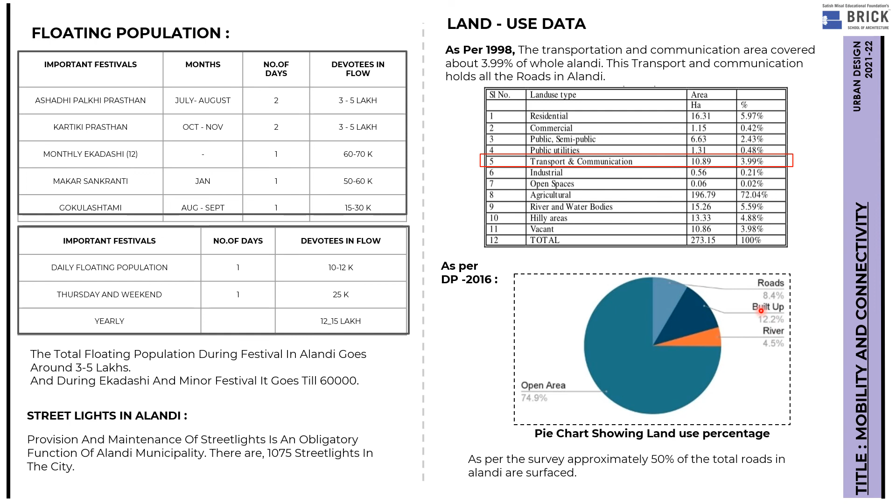The land use of Alandi has changed from 1998 to 2016. The average percentage of transport and communication was 3.9 percent in 1998, and it increased up to 8.4 percent in 2016. Jurisdiction and governance of the roads: the roads in Alandi come under the authorities NHAI, PWD, MSRDC, PMRDA and Jilla Parishad. Types of roads in Alandi: national highways, state highways, district roads and rural roads.

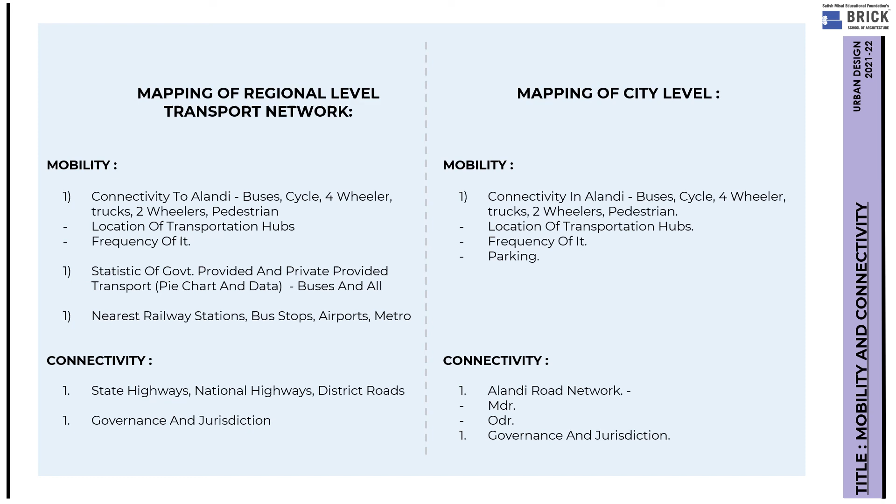Then we have mapped the regional level transportation system and city level transportation system on the criteria of mobility and connectivity. Coming towards the regional level transportation system, it has major railway stations, metro stations, an airport and bus stands. The nearest major railway station is in Pune, around 20 km from Alandi. There are several minor railway stations spread along Pune and Pimpri. The closest airport is around 16 km, in Pune. The total spread of the current metro line is around 31 km, and there are 4 new metro projects proposed in Pune and Pimpri.

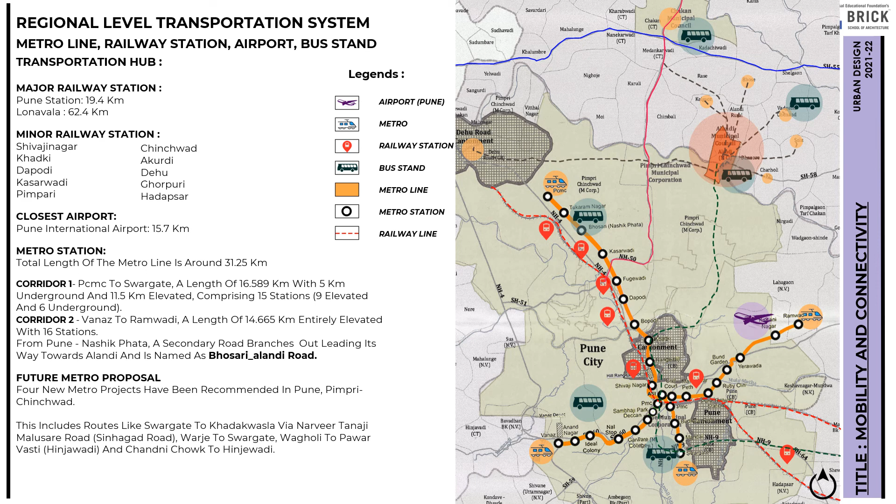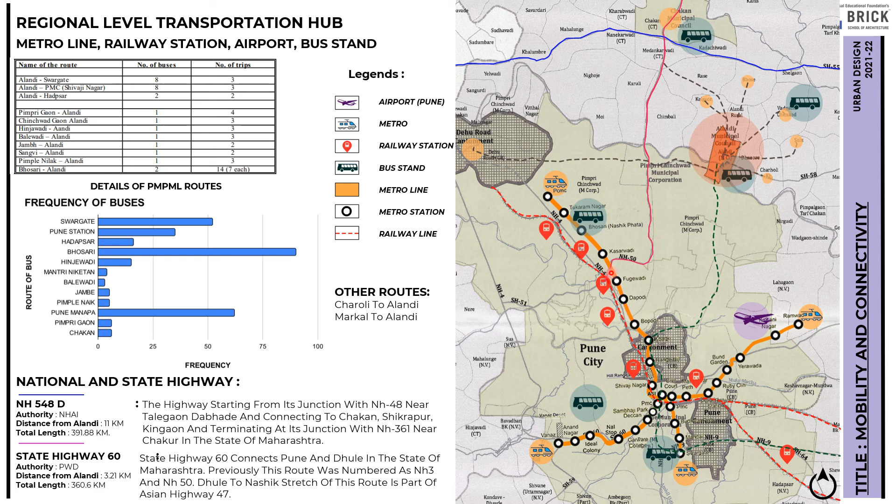Then coming towards the national and state highways: National Highway 548D. The authority which looks after this is NHAI, and it is around 11 km from Alandi. State Highway 60: the authority which looks after this is PWD State Highway. This is around 3.2 km from Alandi. The highway runs from Pune to Dhule.

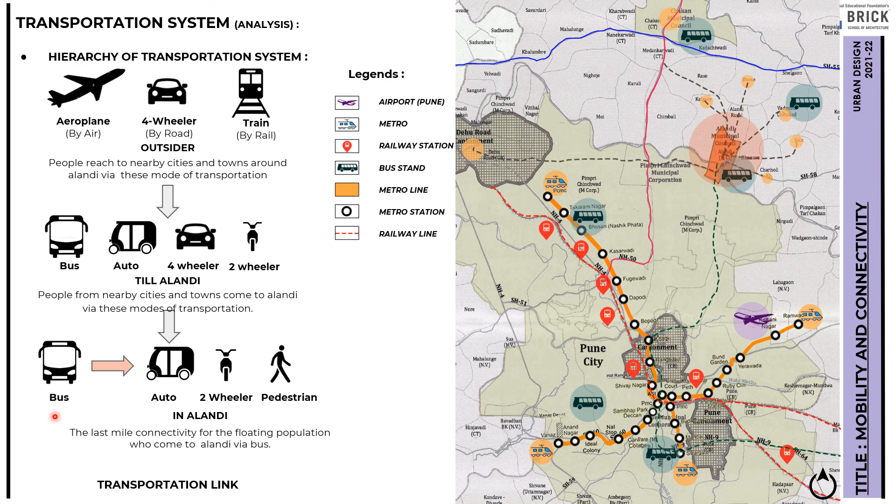The hierarchy of transportation system from outside Alandi to Alandi and inside Alandi. People reach nearby cities and towns around Alandi via aeroplane, four-wheelers and train. People from nearby cities and towns come to Alandi through bus, auto, four-wheeler and two-wheeler. Then the last mile connectivity for the floating population who come to Alandi via bus is auto, two-wheeler and walking. These are the PMPML routes from various places to Alandi.

Proposed transit lines at regional level. Proposed roads: there is a proposal of expressway, primary, secondary, arterial and subarterial roads in and around Alandi, which will be looked after by PWD. There is a proposal to expand the existing 2-lane highway to a 6-lane highway, which runs from Dehu to Alandi, and also the widening of Charoli Road, which will enable vehicles on Pune-Alandi Road to go via Charoli Fata Road. Railway proposal: Crescent Railway is a proposal for the future, around 12 kilometers from Alandi.

The proposed semi-high speed rail: there is a proposed semi-high speed rail network which will connect Pune and Nashik. Proposed metro: there is a proposal of a Nashik Phata and Chakan metro line. This extension will be undertaken in a future phase of the metro project.

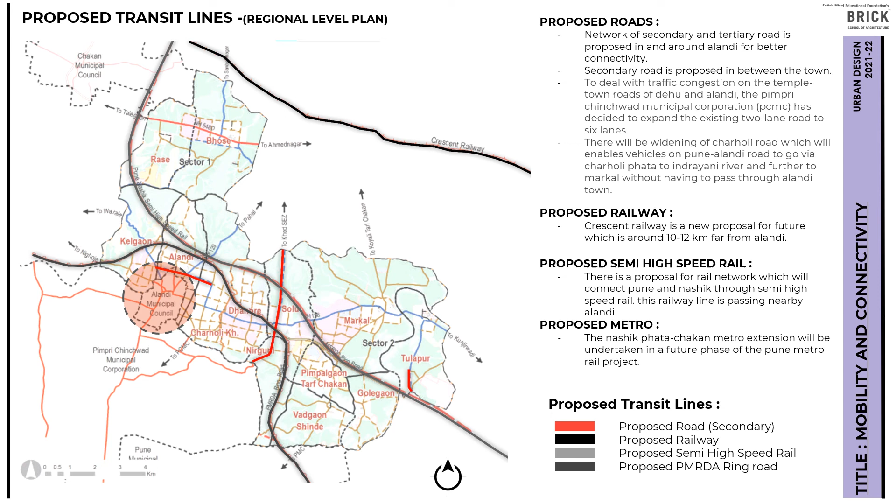NH 965, Saint Dnyaneshwar Maharaj Palki Marg, which was laid on 8 November 2021. The road is a 4-lane road with provision of a 7-meter wide road and a 3-meter wide pedestrian path, especially for Varkaris. The road passes through 3 districts, namely Satara, Pune and Solapur. This brings all devotees to one place and saves 2 hours between Pune and Pandharpur.

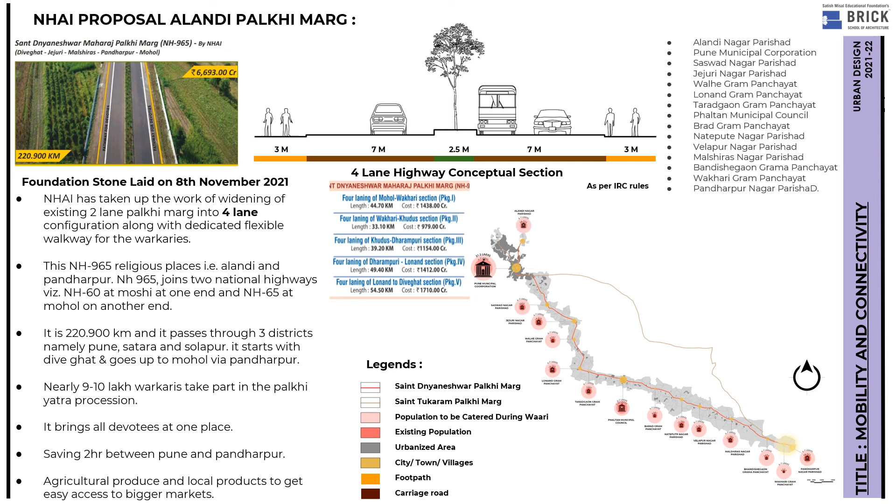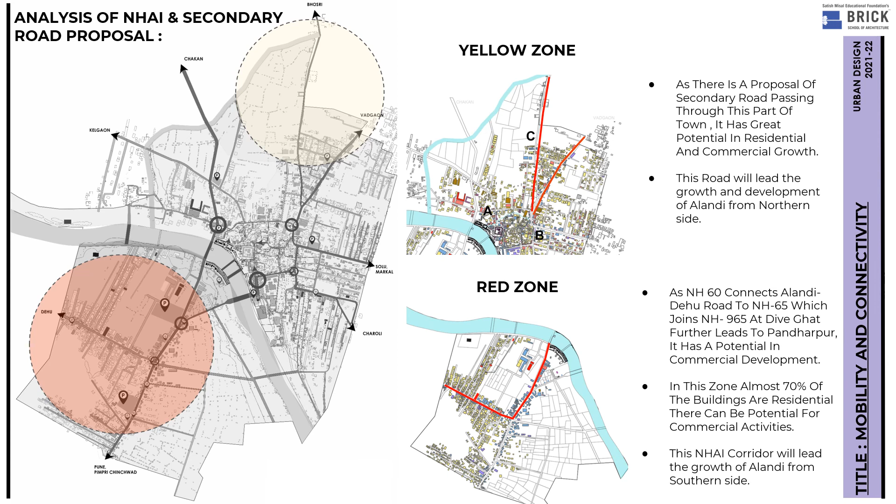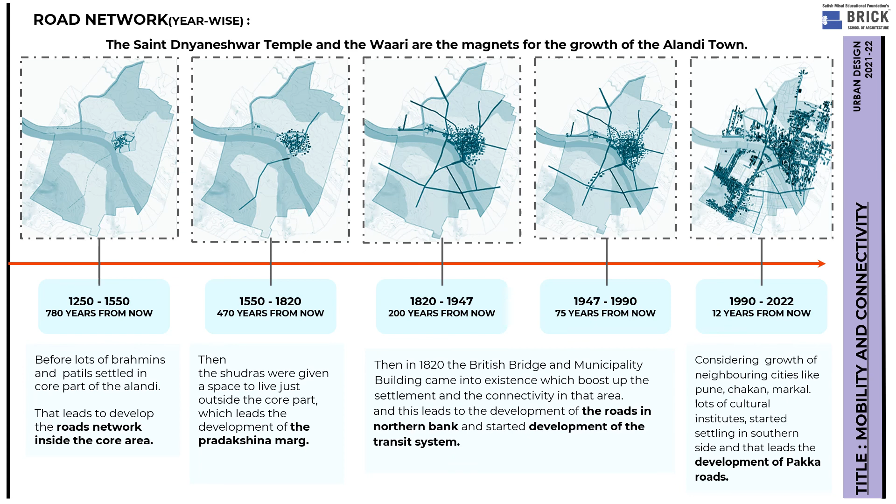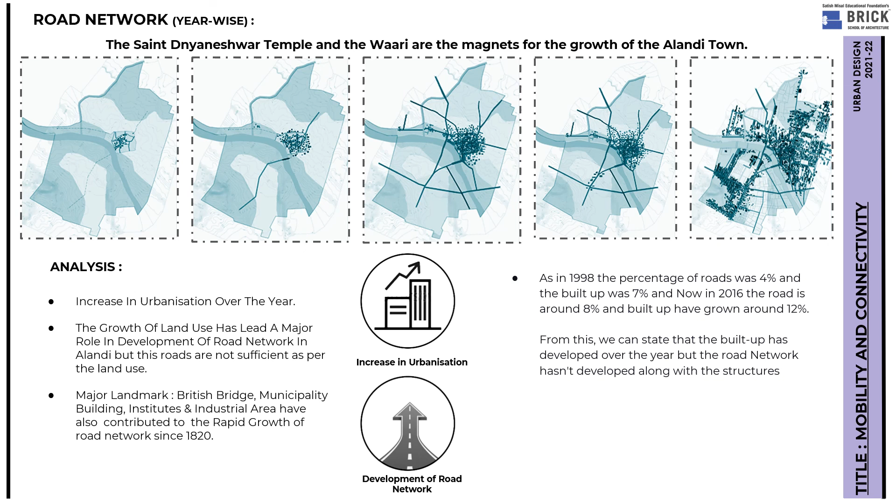City level transportation system in Alandi. This slide shows the evolution of the road network in Alandi and how the road has developed over the years. From this we can interpret that in 1998 the percentage of roads was around 4% and the built up was around 7%. And now in 2016, the road is around 8% and the built up has grown to around 12%. So we can state that the built up has increased over the years, but the road network hasn't developed along with the structures.

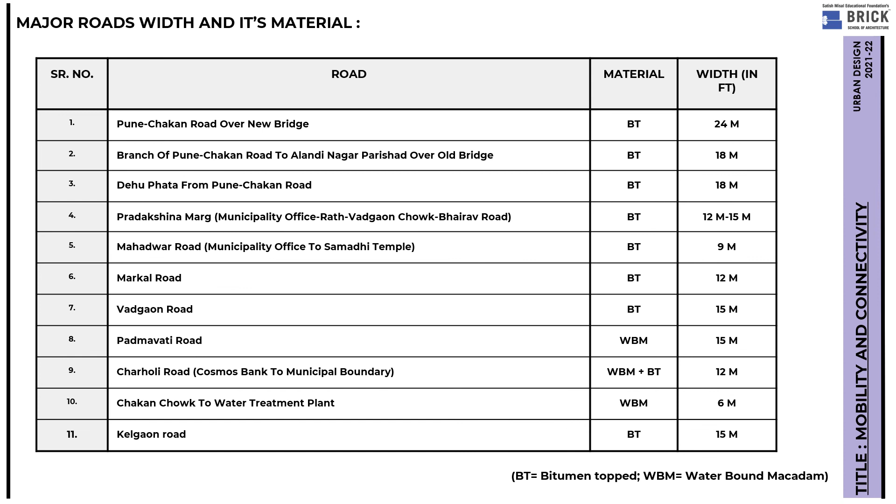This slide shows the major roads and connectivity in Alandi along with their width and material. Then coming on to parking and bridges, there is only one public parking space, which caters to 35 to 40 cars. Here in the image, you can see the encroachments on the roadside, which result in the reduction of the carriageway. As a result, it affects vehicular and pedestrian movement.

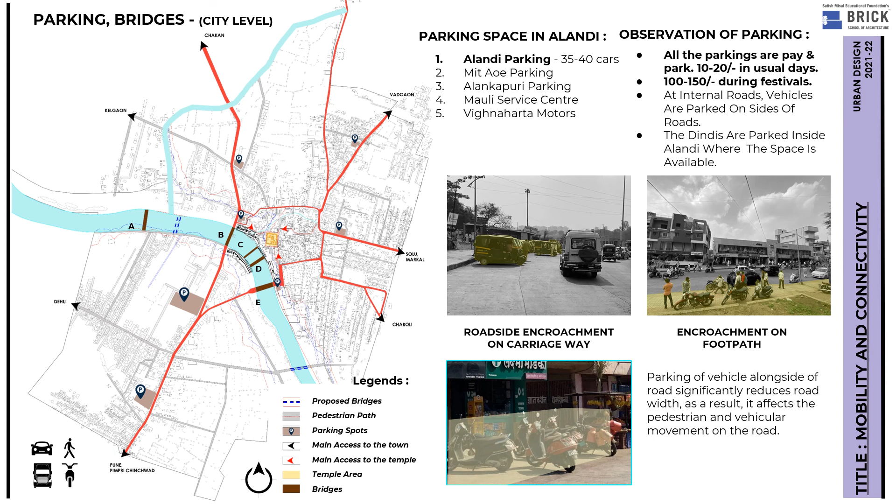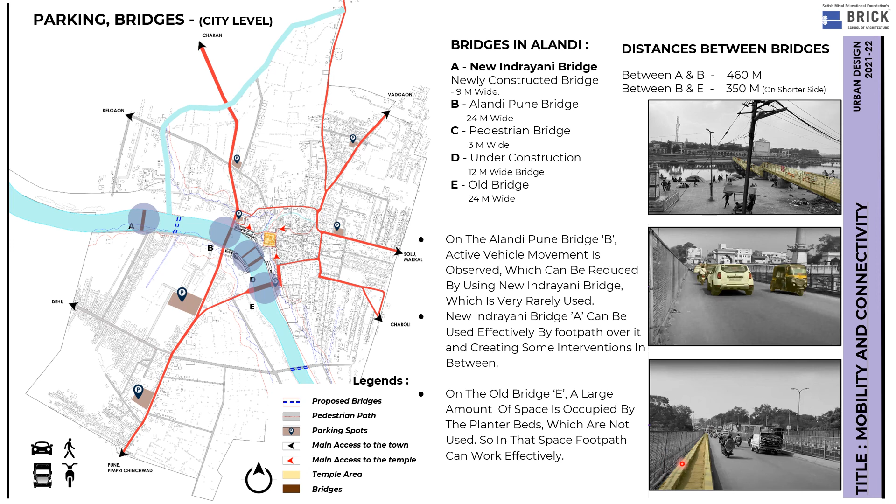Bridges. So Alandi is well connected with the bridges. It has 5 bridges, of which 3 are vehicular, one is pedestrian, and bridge D, which is under construction, is a pedestrian bridge. Here in the last image you can see the planter bed, which can be effectively used as a walkway and can reduce the pedestrian traffic on the road.

Bus stops and bus stands. There is only one major stand, Alandi ST stand, in Alandi with a capacity of 8 to 10 buses. And there are nearly 10 bus stops in Alandi, which are almost all catering to the northeastern and southwestern population, leaving the northwestern population with no bus stops.

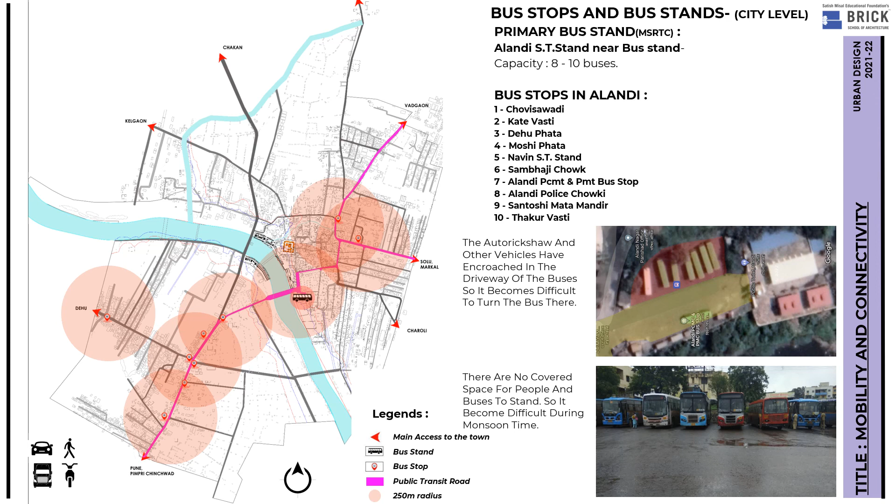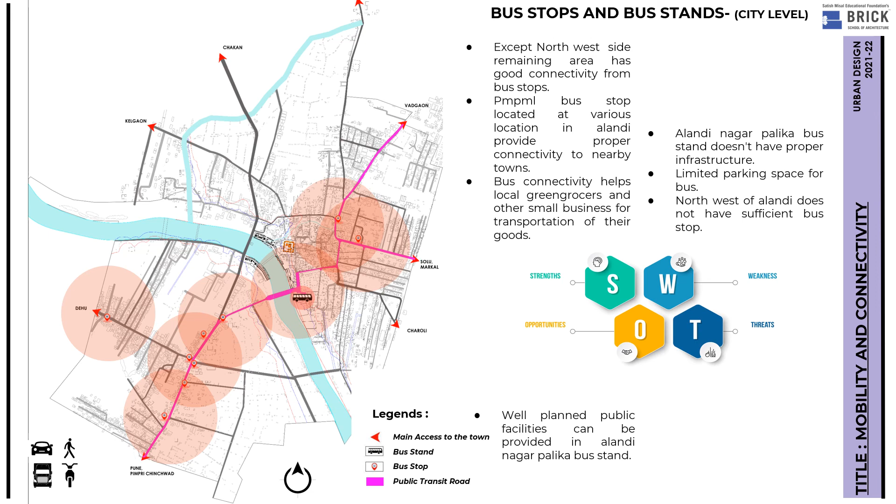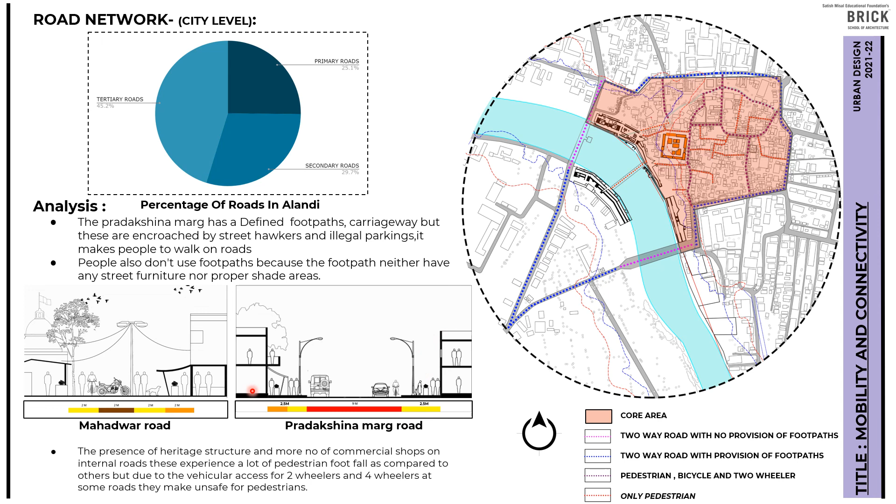Mainly there is a difference in two street characters in Alandi. One is internal streets, 4 to 6 meters wide, with traditional building character, and the other one is Pradakshina Marg, 9 to 10 meters wide with provision of footpath, but the traditional building character is missing over here.

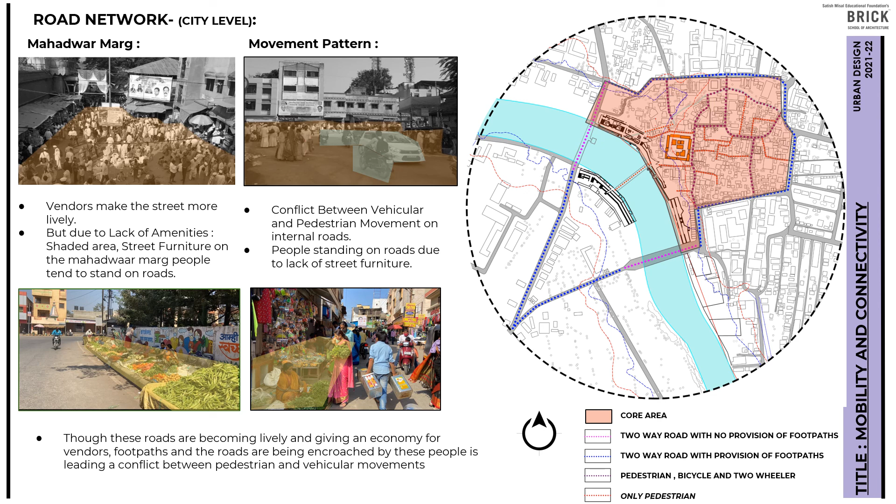Coming to the liveliness of the streets, pilgrims and street hawkers are the people who make the streets lively in Alandi. Due to lots of pedestrian activity on the streets, there is a conflict between vehicular and pedestrian movement. And due to the encroachment of footpaths by hawkers, people can't make use of the footpath.

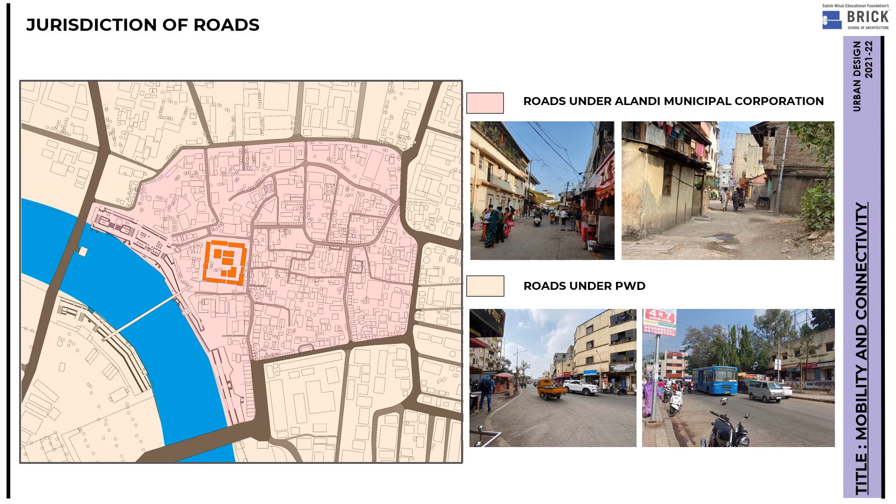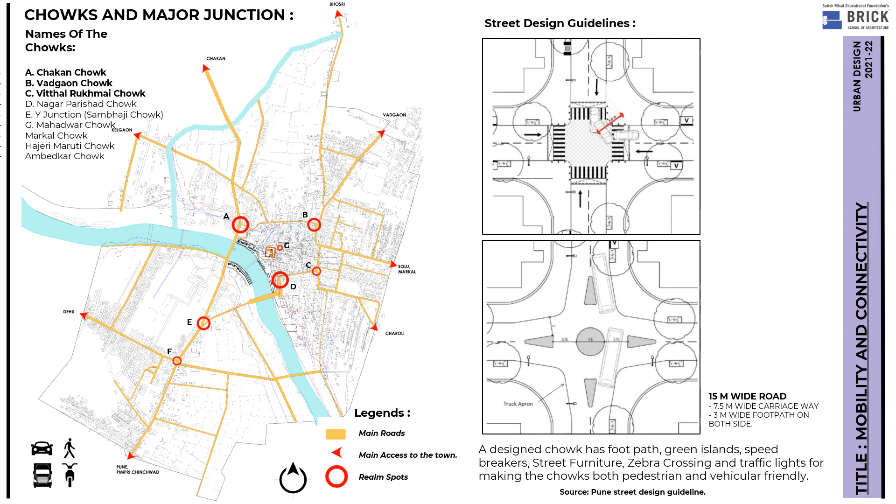Chowks and major junctions. Here we have mapped all the chowks in Alandi. According to street design guidelines, a chowk must have footpath, green island, speed breaker, street furniture, zebra crossing and traffic light for making the chowk both pedestrian and vehicular friendly.

We have studied Vadgaon Chowk. Vadgaon Chowk caters to heavy vehicular traffic. Vehicles are parked along the side of the road, which greatly reduces the effective road width. There is a need for a traffic island at this chowk. There is a need for marking zebra crossings, as there is heavy pedestrian movement seen at this chowk.

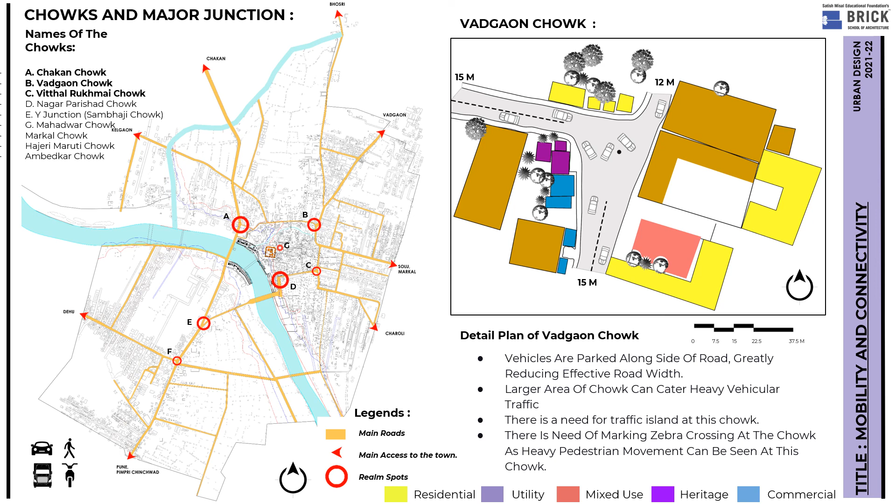At Vadgaon Chowk, there is high intensity traffic which creates congestion due to vehicle encroachment on the road, and there is no alternate parking space provided by the buildings. At Vitthal Rukhmai Chowk, there are commercial shops, heritage buildings and mixed-use buildings, so people tend to park their vehicles on the road, which results in traffic jams.

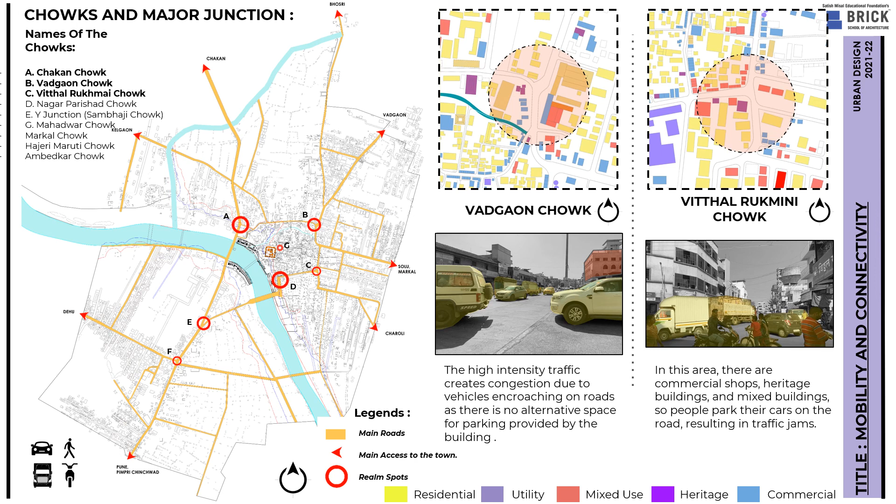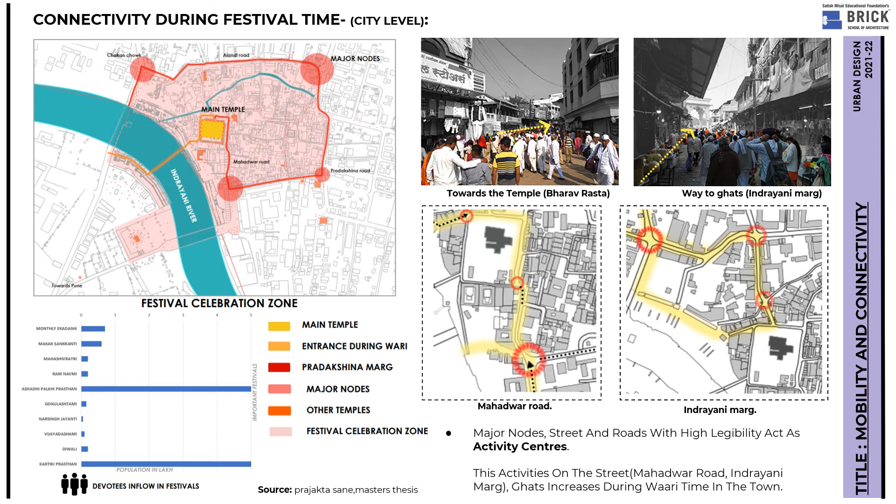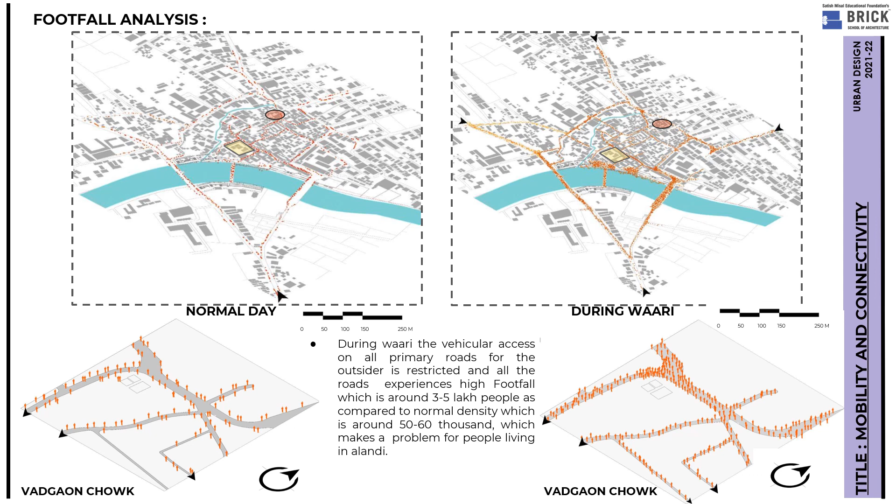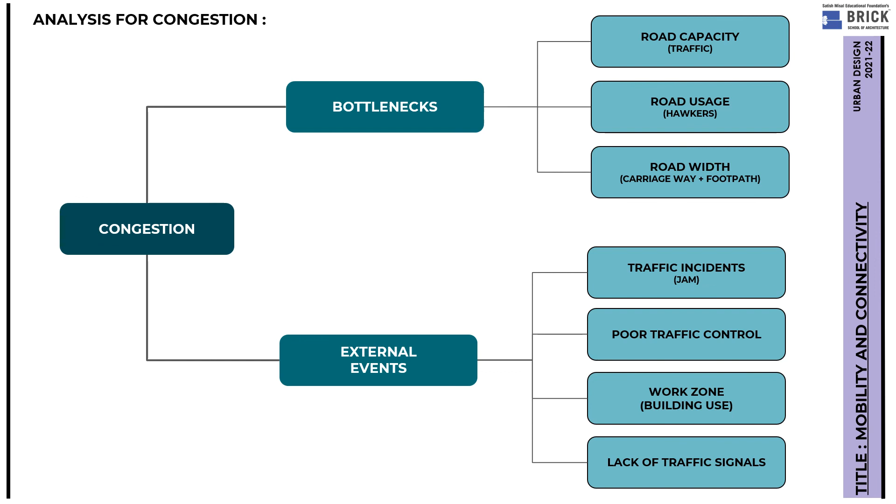Analysis for congestion. Congestion can happen mainly due to two reasons: bottlenecks and external events. Bottlenecks are formed due to road capacity, traffic, road usage by hawkers, and road width. External events which contribute to congestion are traffic incidents, poor traffic control, work zones, and lack of traffic signals.